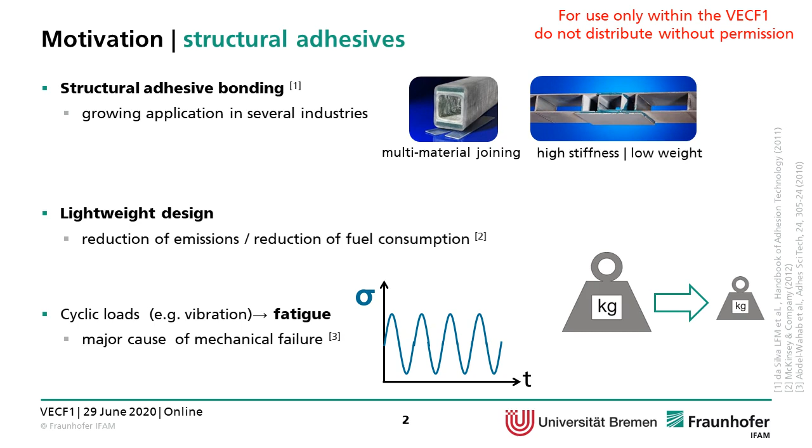And adhesively bonded structures are exposed to cyclic loads, for instance vibration, which makes them susceptible to fatigue. And fatigue is a major cause of mechanical failure for adhesively bonded structures. So given that fatigue is one of the major causes of mechanical failure of engineering structures, it is very important to be able to predict the fatigue lifetime.

So for a given engineering structure subjected to a certain cyclic load, the objective is to find a prediction method that, for a given cyclic load and a given geometry, is able to predict the fatigue lifetime or the number of cycles to failure.

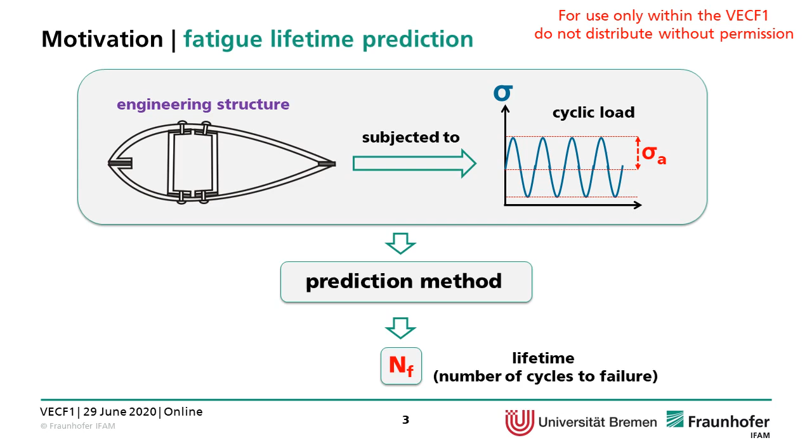Another very important motivation for this investigation is the existence of stress concentrations. In many engineering structures that are bonded, at certain regions, for instance at overlap ends, and also in hybrid joints close to the rivet or close to a bolt, you will find stress concentrations, and they cause local stress raisers, a triaxial stress state, and they are a spot for crack initiation.

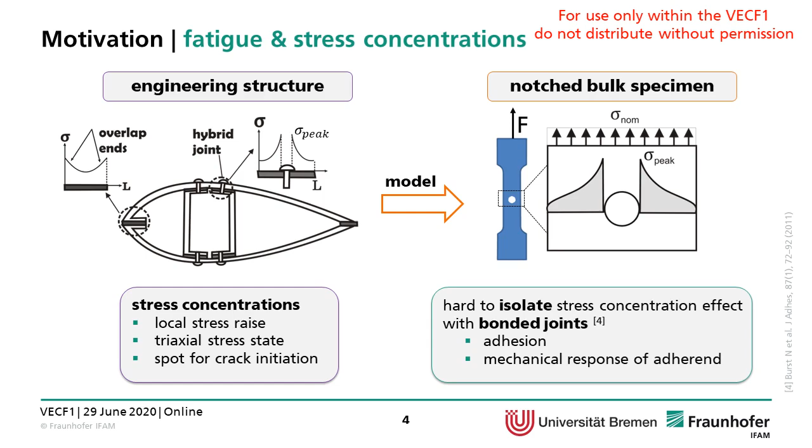However, it's very hard to isolate the stress concentration effect with bonded joints due to the existence of adhesion and also the mechanical response of the adherend. So in order to isolate or study it more easily, we can use notched bulk specimens, which are pure adhesive specimens with a notch, could be internal or external, that will replicate this stress concentration, but with pure adhesive, which makes it easier to study.

In this study case, we use two different types of structural adhesives. Both of them are toughened epoxies, so an epoxy matrix toughened with particles. Both adhesives are single component. One is called RBT, which is toughened with rubber and has a hot cure. And the second one we will call PUT. It's a polyurethane toughened epoxy, also with hot cure.

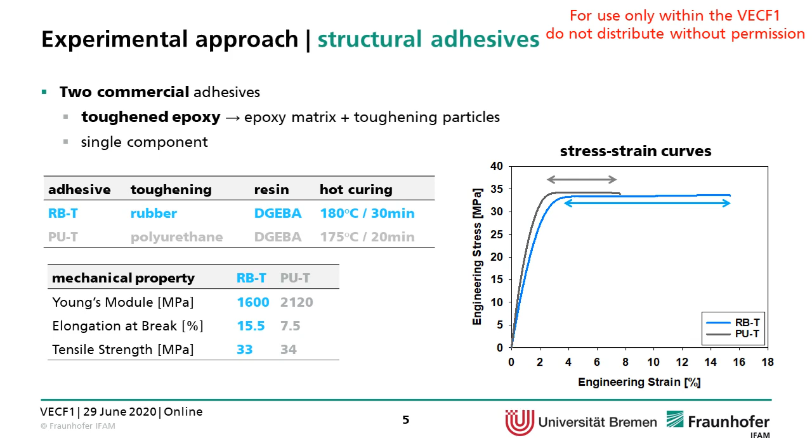Here on the right side, you can see the different stress-strain curves of both adhesives. The PUT adhesive is slightly stiffer, with a Young's modulus of 2000, and the RBT has a Young's modulus of 1600. The RBT adhesive is much more plastically deformable, with an elongation at break of 15.5 versus 7.5 of the PUT adhesive, and they have quite similar tensile strength, around 33-34 megapascal.

Regarding the numerical approach for the simulation, we used an elastoplastic material model. We use this due to experimental indication of a plastic zone, so whitening, as you see here in the quasi-static test, in both types of samples. And we use a linear Drucker-Prager model for the material, since adhesives show hydrostatic stress dependence in their yielding behavior, and many studies have shown that this is a suitable approach for structural adhesives.

So if you compare with the von Mises material model, by plotting the hydrostatic stress and the von Mises stress, you see the difference between the linear Drucker-Prager model and a von Mises material model.

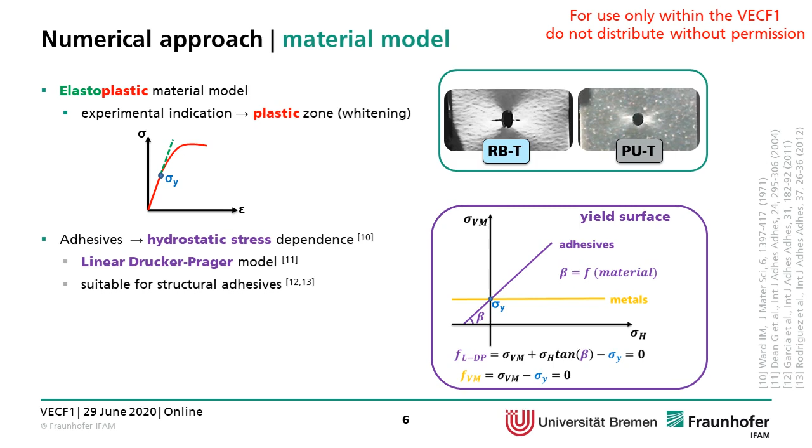For the lifetime prediction, the method was defined as shown here. We use the stress-life approach, which requires stress calculation, in this case using finite element analysis, and an SN curve, which is obtained experimentally. It has a straightforward application and has been proven suitable for adhesives in many projects. And a reference SN curve is necessary. This reference SN curve shows the relation between fatigue strength and fatigue lifetime.

Equivalent stress is necessary because different types of samples will have different types of stresses, and the nominal stress approach is not enough to compare two different types of samples.

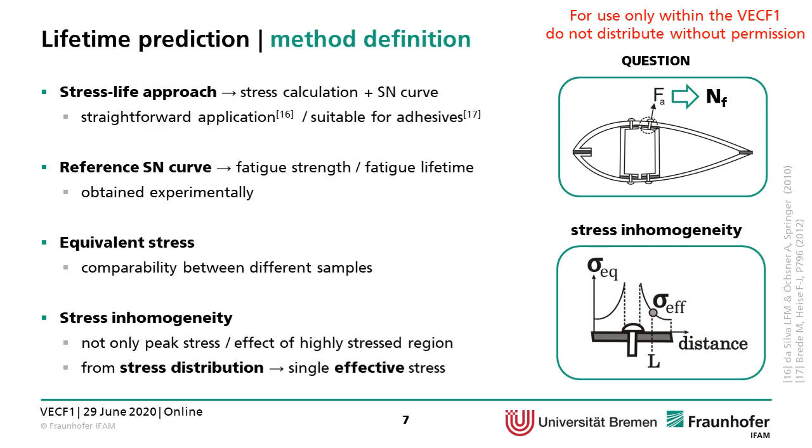And a method must be chosen to address the stress inhomogeneity, because as you can see here on the right-hand side, when you have a stress concentration, you have a distribution of stress. So from this stress distribution, one single effective stress must be taken to represent this stress distribution well. And once again, the question that we want to answer is, given a particular force amplitude, what is the fatigue lifetime. So now the method parameters.

Two equivalent stresses were used in this investigation. One is the Drucker Prager equivalent stress, which is hydrostatic stress dependent. So it has a component of the von Mises stress, but also has a dependence on the hydrostatic stress, and the max principal stress, which is hydrostatic stress independent, which is the maximum value of the principal stresses. To obtain the effective stress, the theory of critical distance was used.

It has been shown valid for adhesives and fatigue in many applications, and is based on a parameter, the critical distance. And here we use both approaches, the point method and the line method. The point method, given the stress distribution, you take the value of the effective stress at the critical distance, and using the line method, we take the effective stress as the integration of the stress over 2 times the critical distance.

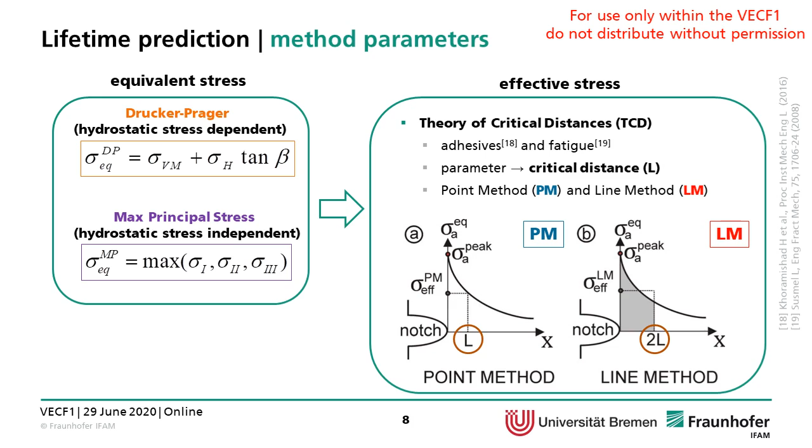Well, one of the main challenges in the use of the TCD for adhesively bonded joints is the determination of the critical distance, so which value of the critical distance to take. In this work, we used a calibration method, which was used for adhesives, for quasi-static predictions. And the idea is that for the same effective stress, you have the same fatigue lifetime. So the idea is to take 2 samples at the same fatigue lifetime, as you can see here, 2 notches, one with internal notch, one with external notch.

Although they have different nominal SN curves, by taking a point with the same fatigue lifetime and plotting the distribution of equivalent stress amplitude, and taking the point where this curve crosses, this is the point where theoretically they have the same effective stress. This crossing point is the critical distance. In this case, for both adhesives, the critical distance was 0.1 millimeter.

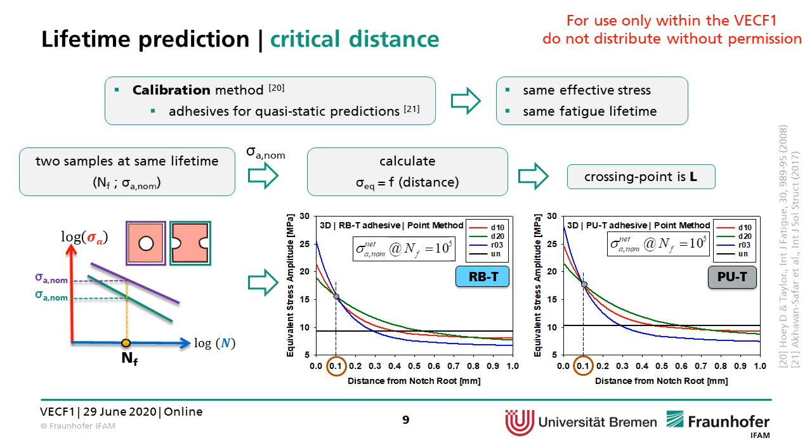Then the process of lifetime prediction was done as follows. So considering the sample to be predicted, which is subjected to a certain force, by having chosen prior the equivalent stress at the critical distance, you have the effective stress. Then, having a reference sample, which has a much easier geometry, in the finite element analysis, you would increase the external force until the same value at the critical distance was obtained in the reference sample. Then, taking the reference sample in the SN curve, you'd be able to predict the lifetime of your sample to be predicted.

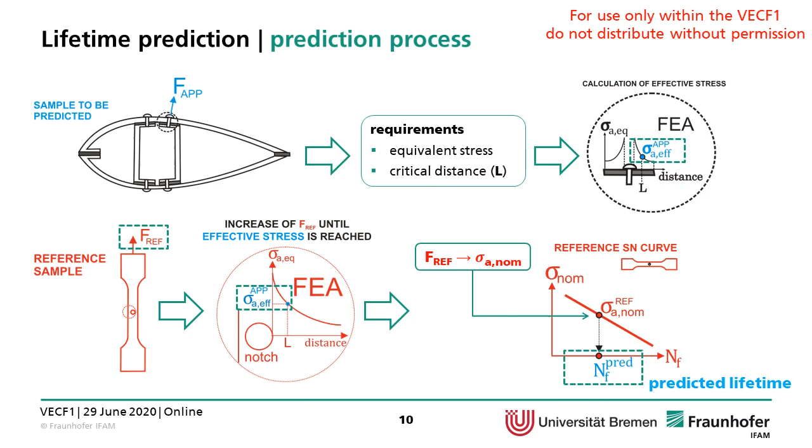The validation of this method was done considering 2 types of adhesives and 3 types of samples with 3 different types of notches, an internal notch of 2 millimeters and external notches with 0.5 and 0.3 millimeters. They have different highly stressed regions, and also they have different stress concentration factors, trying to predict fatigue lifetimes of 1,000, 10,000, 100,000, 1 million cycles using as reference SN curve an internal notched sample with 1 millimeter.

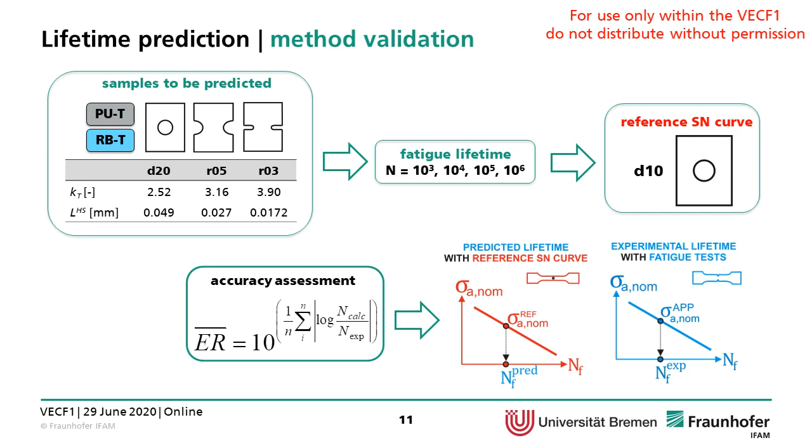In this case, we use as accuracy assessment the error factor, which is basically the factor of your accuracy. For instance, if you have experimental lifetime of 10,000 and your prediction was 20,000, then your error factor would be 2. Or if you have experimental lifetime of 200,000 and then you predict 600,000, your error factor is 3. And comparing the predicted lifetimes and the experimental lifetime.

Here you can see the prediction accuracy using the max principal stress as equivalent stress and the Drucker Prager as equivalent stress for both RB-T adhesive and PU-T adhesive. By looking at the equivalent stress, the Drucker Prager equivalent stress has a high accuracy. As you can see here, the relative error factor of the purple curves is much smaller than the orange curves. Regarding the adhesives, we had a higher accuracy with the PU-T adhesive, and regarding the TCD method, point method or line method, for the max principal stress, it was better with the point method, and for the Drucker Prager stress, there is no clear trend.

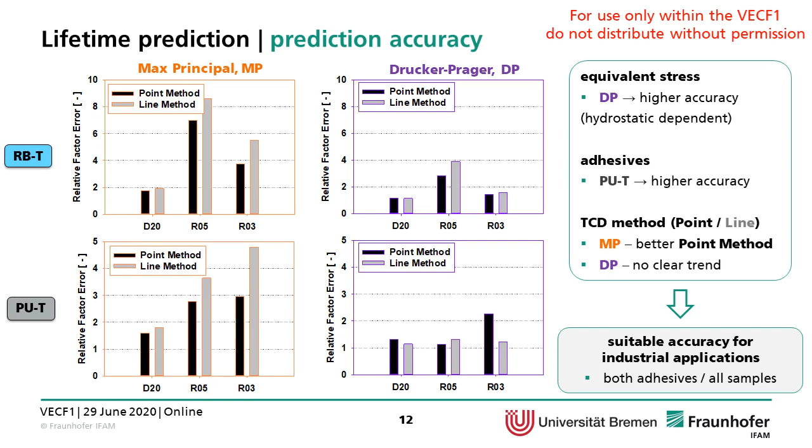But it's important to highlight that by using the Drucker Prager equivalent stress, we had a suitable accuracy for industrial applications, which for adhesives is around 5 to 8. A factor of 5 to 8 is good. And this was obtained for both adhesives and all types of samples.

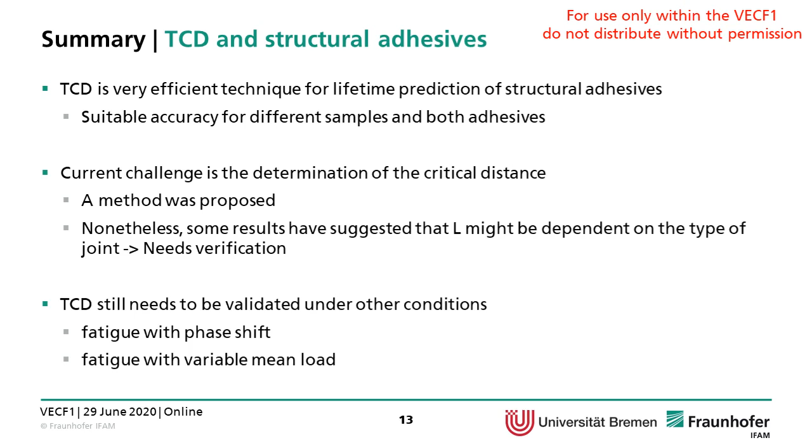Now to summarize some of the results that we had here regarding the use of TCD for structural adhesives. TCD is a very efficient technique for lifetime prediction of structural adhesives. We had a very good accuracy for different types of samples and both types of adhesives. However, the current challenge is the determination of the critical distance. A method was proposed here. Nonetheless, some results have suggested that the critical distance might be dependent on the type of joint. So for other projects, this still needs verification, and the TCD still needs to be validated under other conditions, for instance, fatigue with phase shift, fatigue with variable mean load, etc.